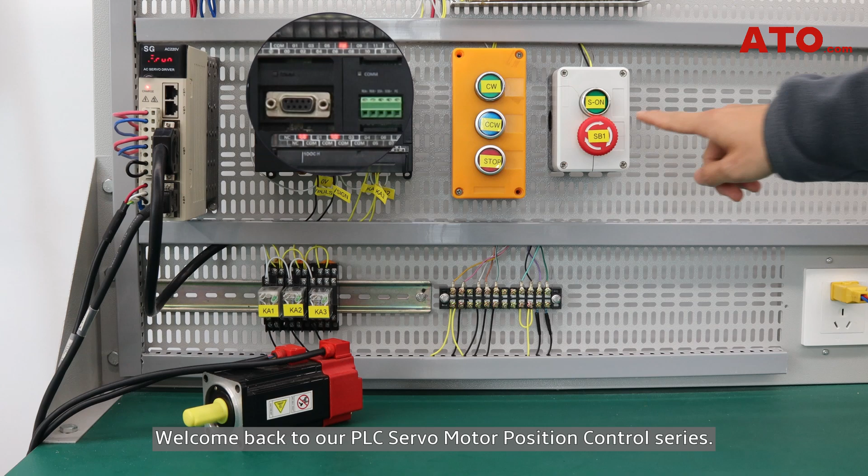In Part 3, we demonstrated how to enhance system safety by integrating dual emergency stop functions into a servo position control system with overtravel protection. In this episode, Part 4, we take it a step further. We will explore how to run this PLC servo control system with the servo enable signal S-on kept on all the time. First, let us quickly review the key components required for this system.

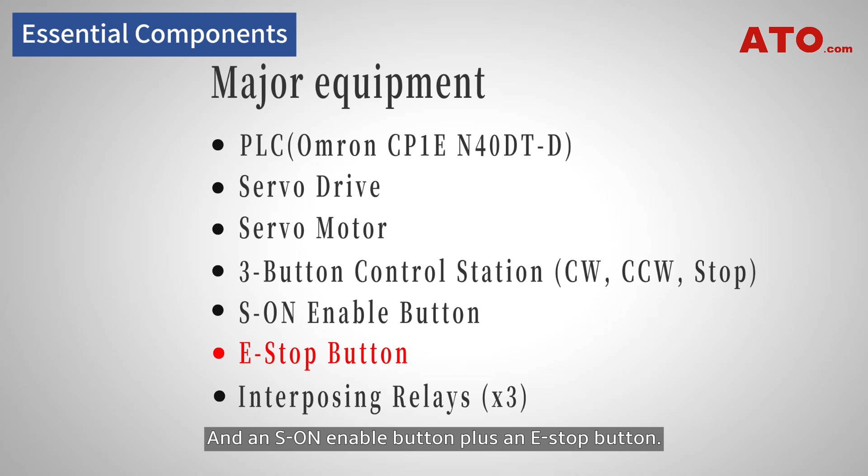You will need a PLC, a servo drive, and a servo motor, a 3-button control station, and an S-on enable button plus an E-stop button. Also, 3 relays for our overtravel protection setup.

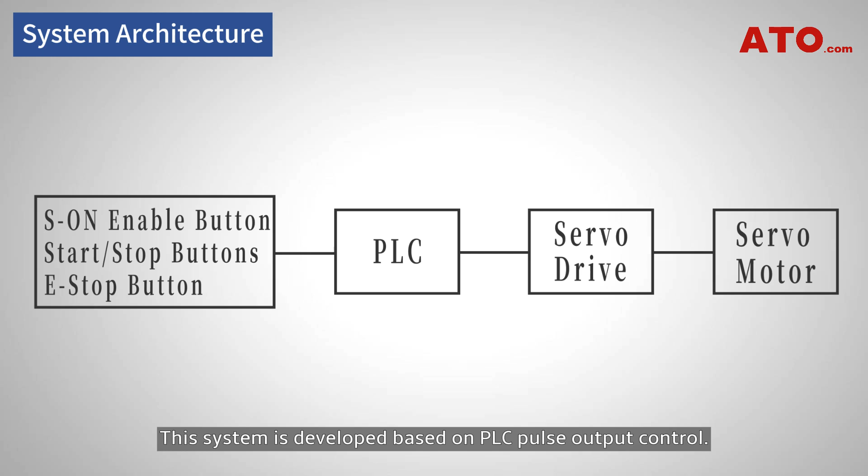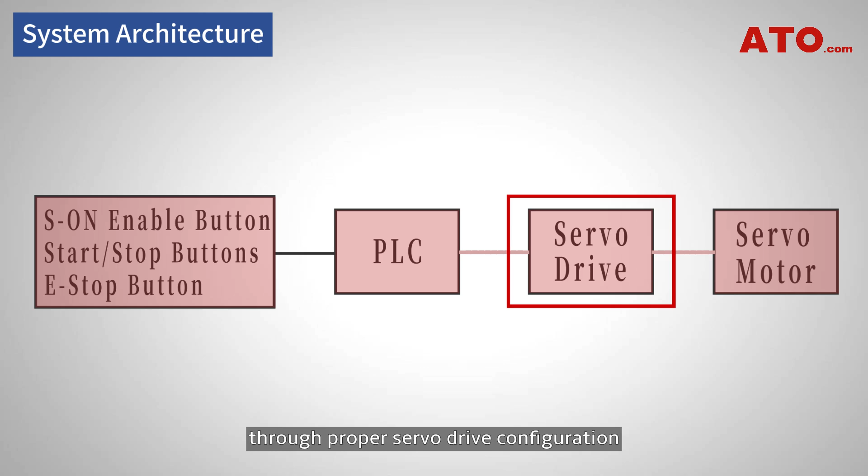This system is developed based on PLC pulse output control. The PLC outputs pulses to the servo drive and the drive rotates the motor. The control buttons and emergency stop button manage the drive enable, motor start, stop, and emergency stop. The key difference today is that we'll leave the enable signal S-on continuously on during the entire test through proper servo drive configuration without any external enable command.

Let us walk through the physical wiring setup. The 3-button pendant station connects to PLC inputs. The emergency stop button is connected to the PLC input and wired in series with the S-on enable button. The S-on signal is also connected to pin 7 of the servo drive's CN3 connector. The PLC outputs pulses to the servo drive, which then drives the motor.

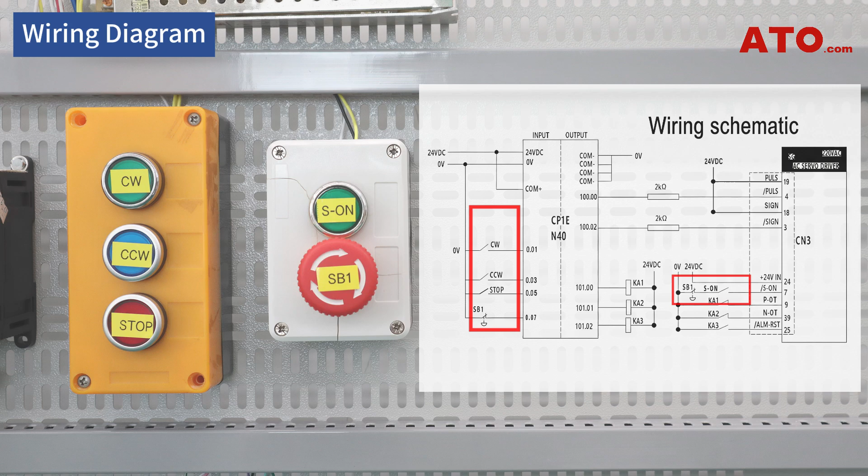Next, let us look at the wiring diagram in more detail. The diagram highlights the connections for the start and stop buttons, the enable button, and the emergency stop button. Next, the diagram shows the PLC input and output terminal configurations. CN3 wiring uses color-coded wires connected to specific terminals. Each wire matches a specific function and a pin number. Follow this table carefully when preparing your CN3 cable.

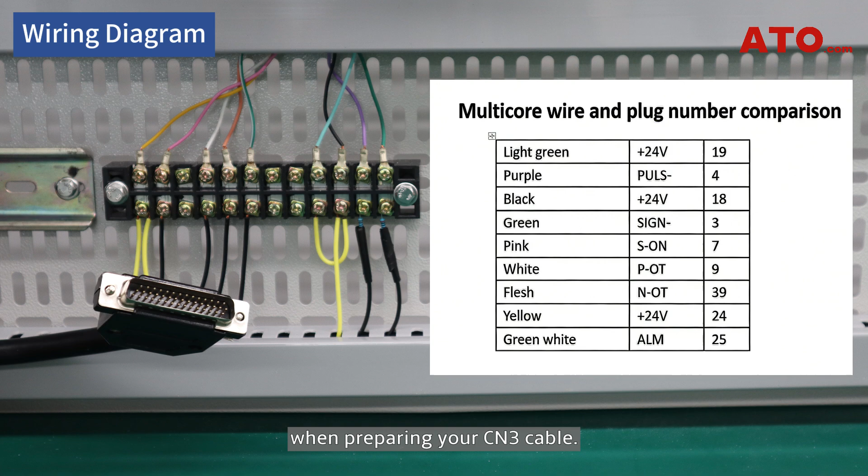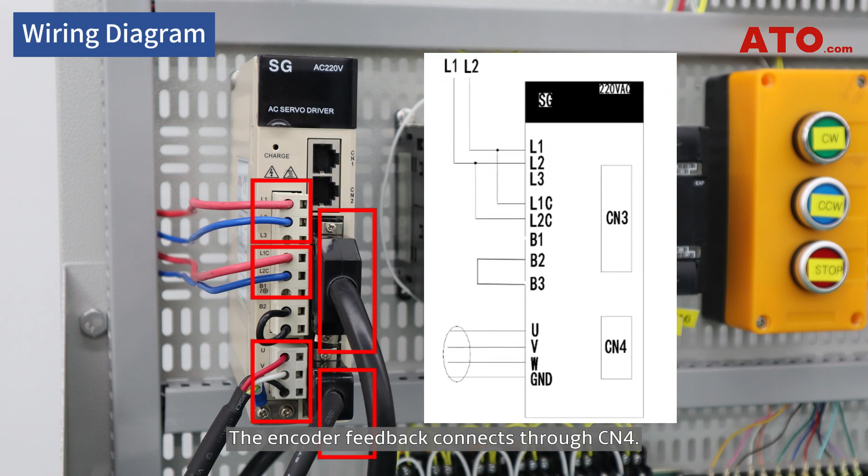This diagram shows the servo drive connections. For power, connect mains to L1 and L2. Control power to L1C and L2C. The motor connects via U, V, W, and ground. The encoder feedback connects through CN4. The 3 relays handle overtravel and alarm reset. See Part 2 for detailed relay wiring.

Now configure the servo drive. Press M set twice to locate PN000, which defines the control mode of the drive. Press data to edit. Set the value to N0010. This enables position control using pulse train references. Press M set to save.

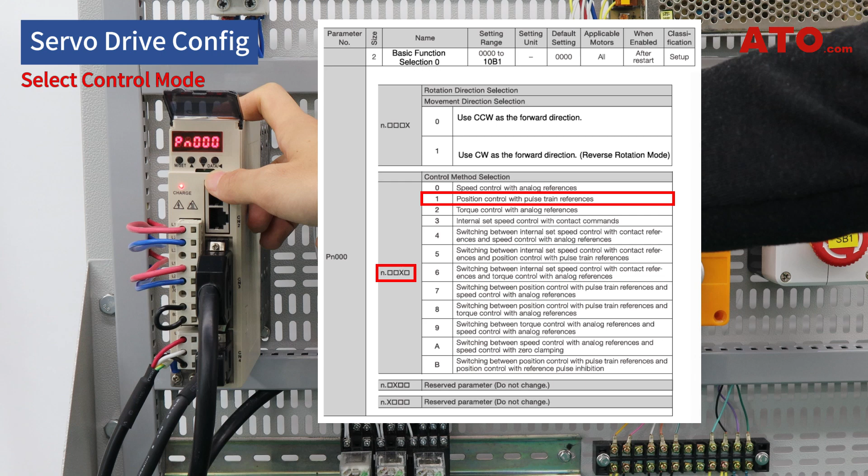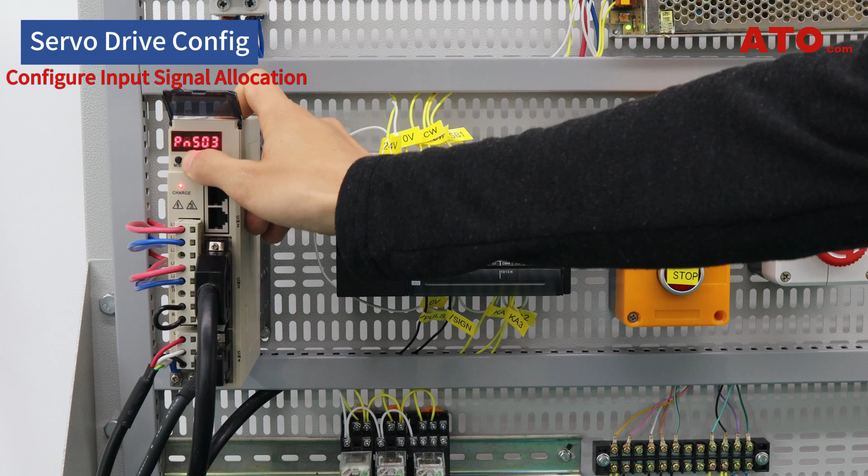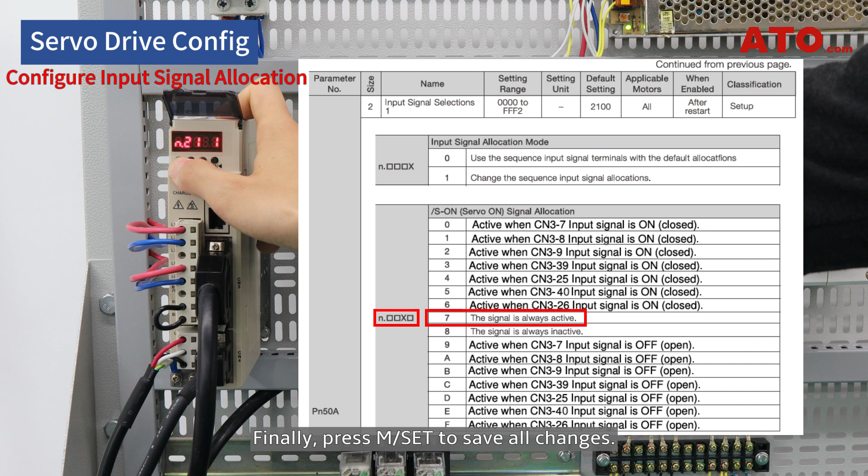Next, we configure the input signal allocation. Navigate to parameter PN50A. Set it to N2101. This enables user configurable input signal allocation, allowing us to customize which inputs are active. Within this mode, set the servo on input to N2171. This keeps the servo continuously enabled. Finally, press M/SET to save all changes. The drive is now configured.

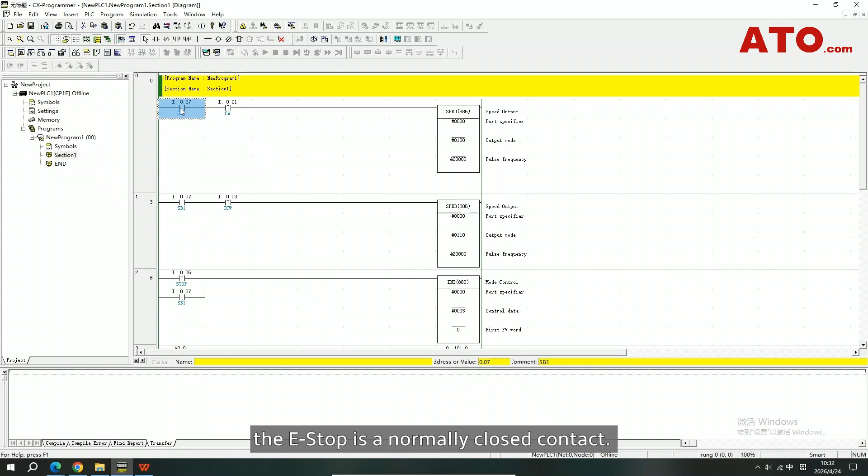Now let's program our master controller. Create a new project. Select device type CP1E and set the CPU type to N40. In the ladder logic, the E-stop is a normally closed contact, so the PLC sees this input as constantly on.

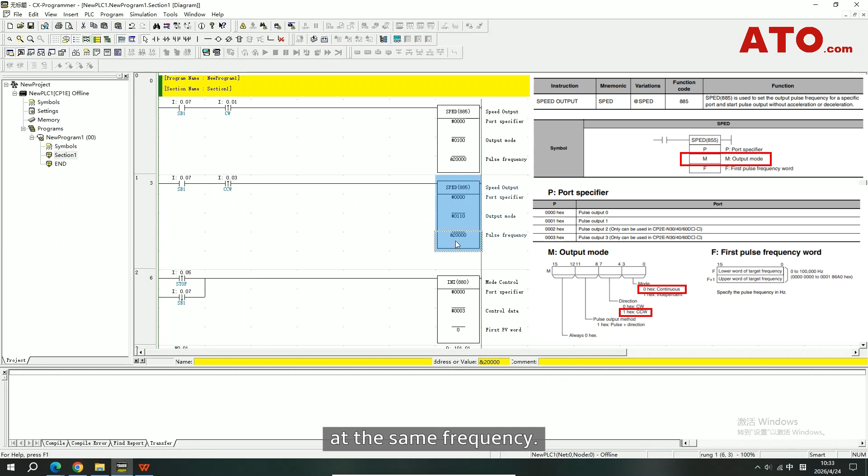When you press the clockwise button, the PLC outputs a 20 kHz pulse train and the motor rotates clockwise. Pressing the counterclockwise button rotates the motor counterclockwise at the same frequency. Pressing stop halts pulse output, and the motor stops. If the emergency stop is pressed, the motor stops immediately, and all motion commands are interrupted.

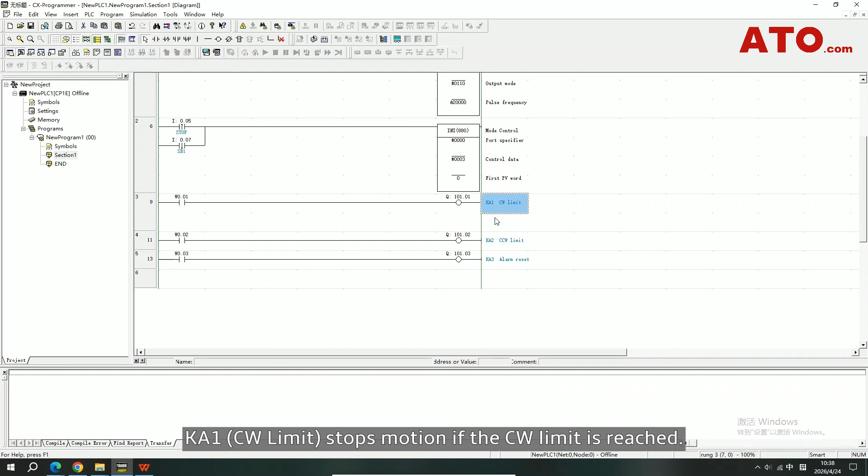Let's re-verify our limit protection logic. KA1 stops motion if the clockwise limit is reached. KA2 stops motion if the counterclockwise limit is reached. KA3 acts as the alarm reset relay. If a fault occurs on the drive, it allows you to safely reset the alarm codes from the panel as detailed in the manual. Let's run a live benchmark test to see how it works.

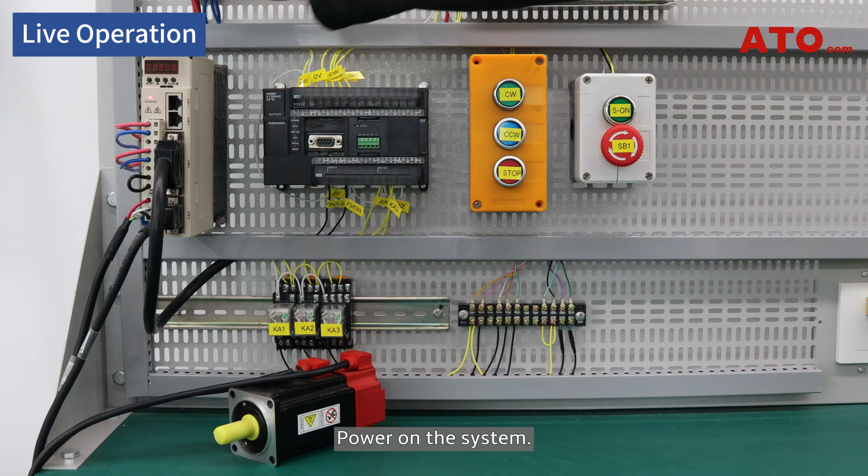Power on the system. Notice that the servo system enters the on state immediately without any additional enable command. Press CW, motor rotates clockwise. Press stop, motor stops. Press CCW, motor rotates counterclockwise. Press E-stop, motor stops immediately.

The servo motor only stops when pulse input stops. Without pulse input, the motor stops, but the drive remains enabled, so always ensure the E-stop is functional and PLC logic cuts pulses correctly.